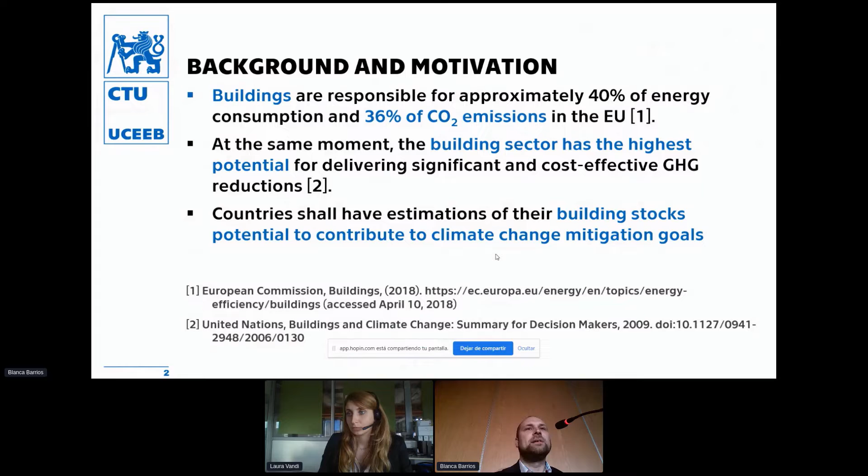So that was the motivation, and the objective of our study was to contribute to our national discussion and to review the renovation options of the existing building stock, define the renovation scenarios, quantify the potential of CO2 savings of each scenario towards 2050. And we also wanted to consider the potential impacts of future reduction of emission factors and the cleaning of the electricity system and so on.

And we also wanted to prepare a number for discussion at the national level for the potential share of the building stock in the national greenhouse gas emissions altogether.

The work was being done in past years in a couple of national projects, and it is also aligned to IEA Annex 72 on carbon footprint of buildings and carbon benchmarks for buildings.

And in order to deliver what we wanted and arrive at our goals, we first needed to make an inventory of the Czech building stock, then model its energy consumption, then define the scenarios, then define the energy sources and the shares, and estimate the future path and uptake of building-integrated and building-attached PV systems.

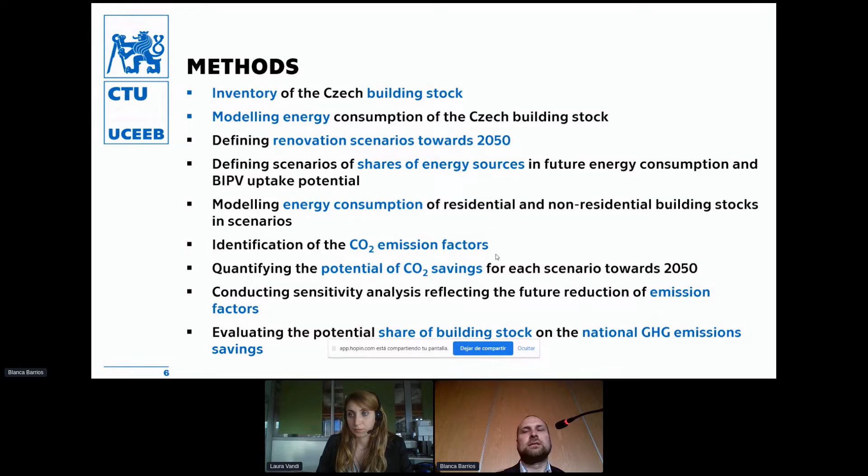The inventory of the Czech building stock was based on statistical data. We had data from the Czech Statistical Office. They also focused a survey in 2018 on the building stock. We got a survey on energy carriers used in buildings in the Energo 2015 census.

We also used the data from the National Registry of Energy Certificates and Energy Audits, provided by the Czech Ministry of Industry and Trade. We also had data from associations focusing on energy efficiency in buildings, such as associations of producers of thermal insulation and so on. We used data from them to estimate how big a proportion of the building stock is already renovated and what the renovation rate is, because we don't have an official number at the government level.

For the modeling, we divided the stock into residential and non-residential, and we used a stochastic model of 1,000 single-family houses and multi-family houses for the residential building stock. It was a dynamic simulation with variance, adapted to be representative of the building stock, for the numbers that came from the statistics.

For the non-residential building stock, we have real models of 100 representative buildings of different types, shapes, and uses. These are real models that were used for energy audits, so there are real data on consumption and on the options for renovations.

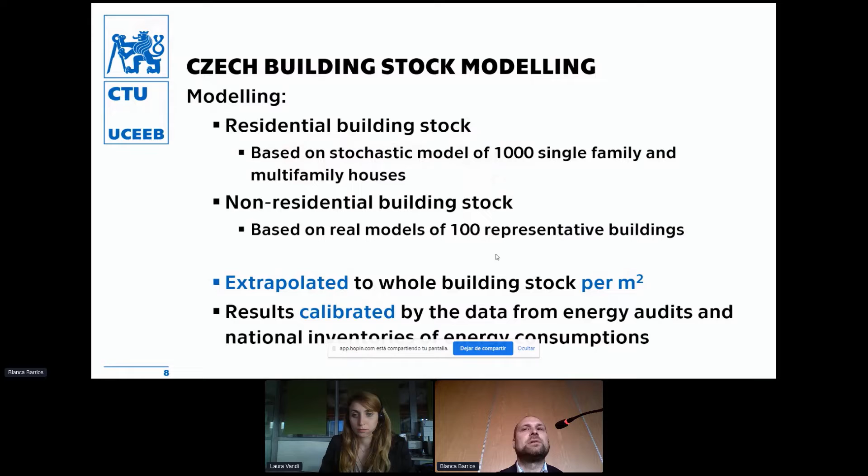So we used these models and extrapolated the outcomes to the building stock per square meter, energy-wise. And we calibrated the results to data from energy audits and from the national inventories of energy consumption.

After that, we defined 4 scenarios. The first was the baseline scenario, which corresponds to the state-of-the-art policy as it was in 2016-17 when we started this research. So that was the baseline. Our baseline year was 2016, in fact, already.

Then we have the scenario that was defined by the Ministry of Industry and Trade, which is responsible for the energy agenda of the Czech Republic, because we had the feeling that this scenario is not ambitious enough. That's why we included it, to be able to compare it with the other 2 scenarios.

One was the progressive scenario, modeling progressive deep energy retrofitting of the building stock, and we also have a hypothetical scenario, which was even faster. I will show you the shares that were considered.

So basically, each of the rectangles represents 100% of the Czech building stock. On the left is the base year 2016.

At the end, on the right, is 2050, and this is modeling of different levels of renovation rates. So basically, the gray part is the non-renovated building stock.

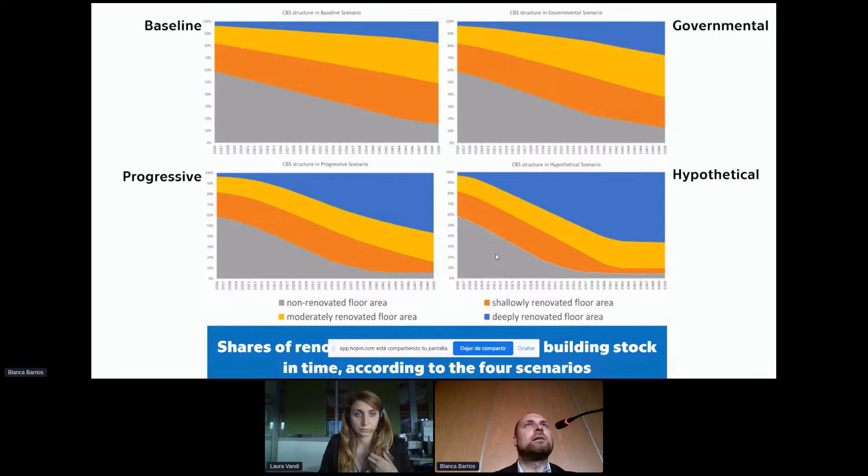We have created the path of the transition between the energy carriers. So you can see the starting point, which comes from statistics for 2016, and then we defined various ambitious levels for each scenario.

I will then show you the link to the paper when it's described more in detail.

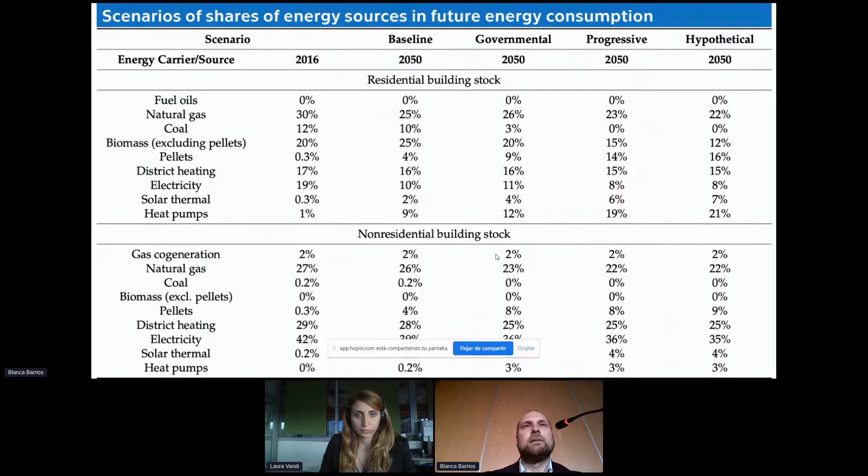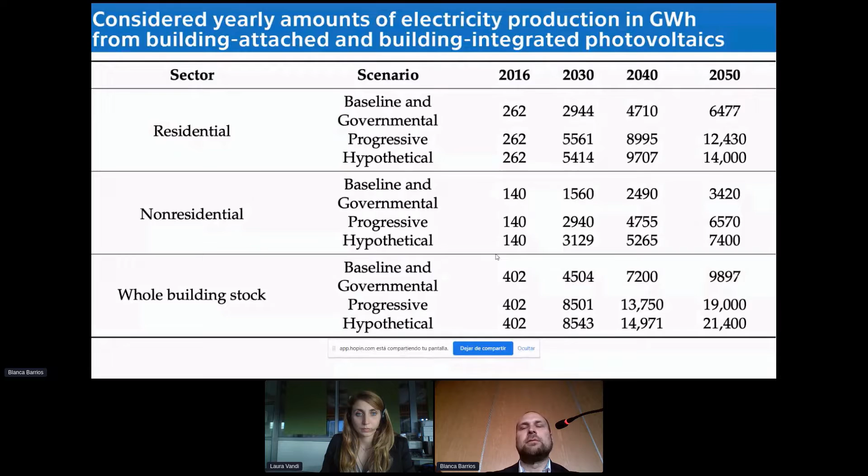We have considered yearly amounts of electricity production from building photovoltaics. We collaborated with the Association of Photovoltaic Systems of the Czech Republic, and they provided us their models and predictions how it could develop with the building attached and building integrated photovoltaics, and we used their scenarios to apply them to our models. Then we identified the emission factors.

Some of them are quite crude numbers, not really precise, but the precision of the whole estimation is somehow limited. So we went with them, and then we made the sensitivity analysis to be able to say how much it is sensitive to variation in future changes.

You can see that electricity from the national grid is quite dirty still. A couple of years ago, the numbers were much higher. Now we are shutting down brown coal power plants, so it's going down. So the official number in 2019, when doing this simulation, was 0.6. Nowadays it's like 0.48, and it goes steadily down, but it's still the second or third dirtiest energy grid in the European Union.

For the various scenarios, for the sensitivity analysis, we have just used two thirds and one third of the electricity emission factor.

We also were looking into the reduction of emission factor on district heating systems, because renewables are being more and more applied in district heating. And we also worked with some syngas or biogas options that could be filled into the gas distribution system. So we also modeled some reduction of the emission factor of natural gas nowadays.

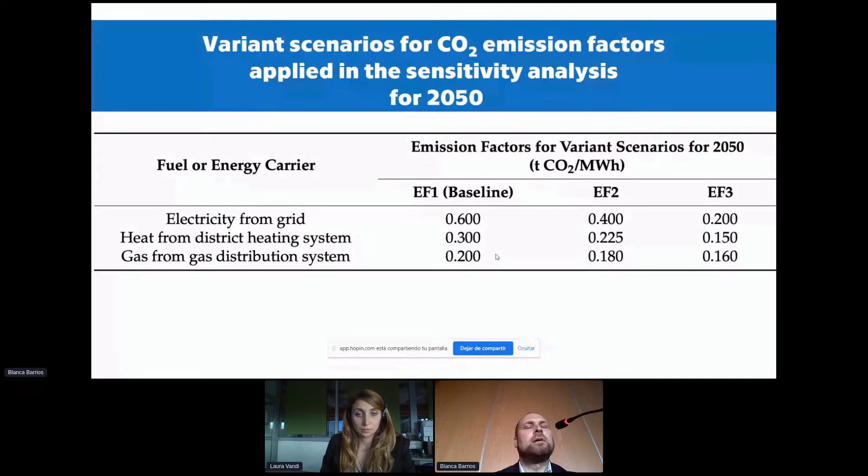So after we calculated, we evaluated the potential share of building stock of national greenhouse gas emissions. This was our starting point, because the goal, which is not much ambitious at all, but it's some goal that was written in our legislation, is 80% reduction compared to 1990. So it's our national target for the whole country: some 33 megatons of CO2. To put it in perspective, in 2016 it was 106.

So when we make the calculations and modeling of the Czech building stock, we came up with a figure of about 37 megatons of CO2, which was about 35% of the national emission. So basically, if we have the buildings as we have now, and we would like to reduce the national emissions by 80%, we would need to switch everything else except buildings, which is of course not the case.

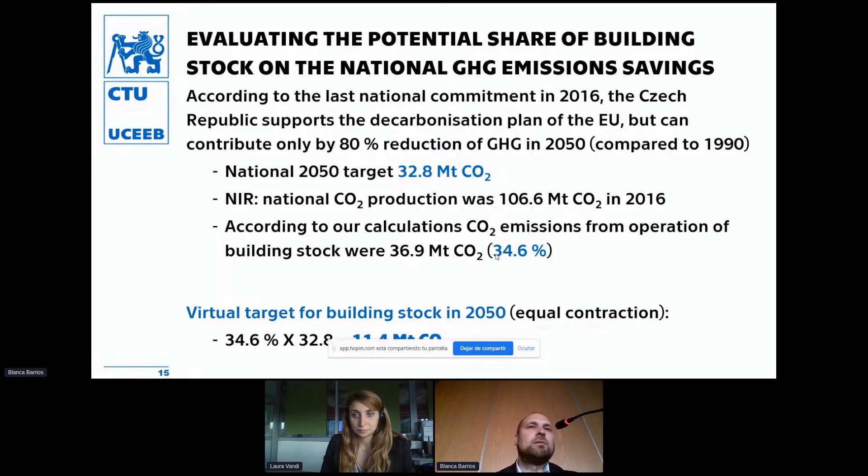So we set some virtual target for buildings. We calculated with equal contraction of the sectors. So we took the 34.6% share, multiplied it by the national target, and we arrived at 11.4 megatons, which is the emission goal - quite soft, but still a goal for the building stock. And we are looking if we can achieve that.

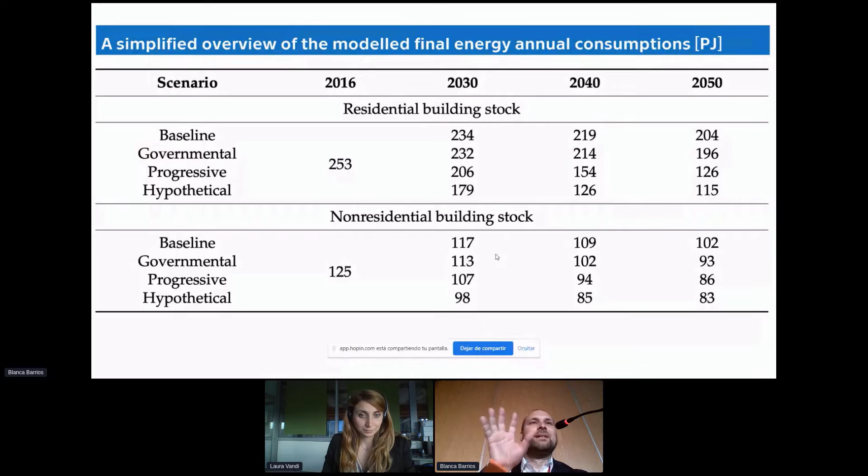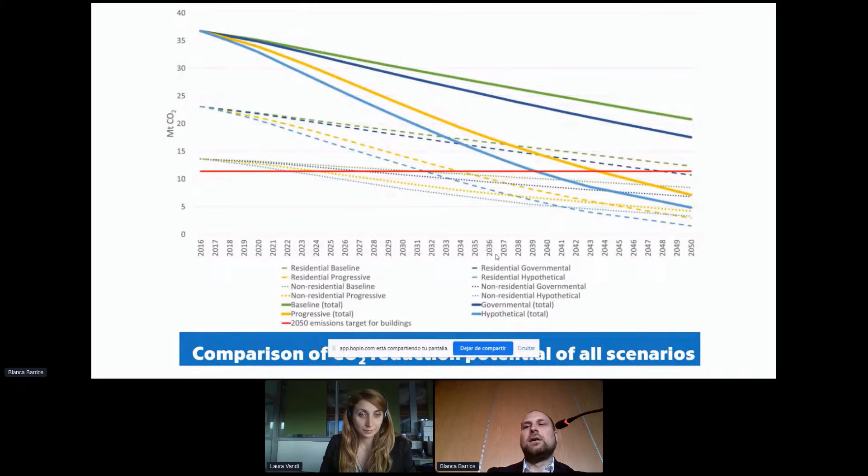So results: residential and non-residential building stock, but I will show you in a chart better. The full lines represent the whole building stock in the scenarios. The red line is the 80% goal, and you can see that the governmental scenario would not be reaching that goal. The other two would be possible to arrive at: the progressive and hypothetical.

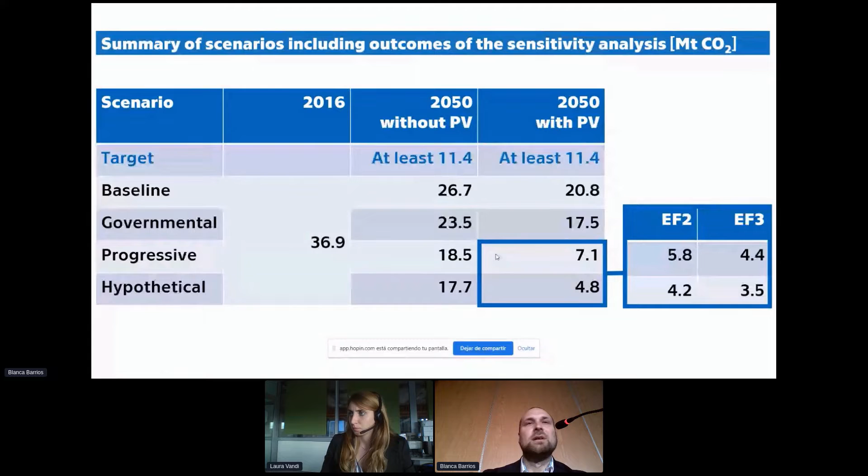And if we look at the numbers, as I mentioned, the goal was 11.4 megatons. And if we look into future changes in the emission factors as well, we can reduce it to 3.5, but it's still not zero, at least for what we have. There are a lot of uncertainties - emission factors, future development of shares of energy sources, development of building stock, and the patterns of energy consumption in buildings, and climate change. And we left out the embodied emissions entirely - that's another story.

So I'm arriving at the conclusion. If the national commitment is to be achieved, we need to apply at least the progressive scenario, which means that we need to speed up the renovation rates to 3% per year until 2025, and go to the passive house level for most of the new renovations. And if we combine the decarbonization of building stock, like in the operation measure, it's almost possible, but it would need bold actions and of course high investments and support from the state.

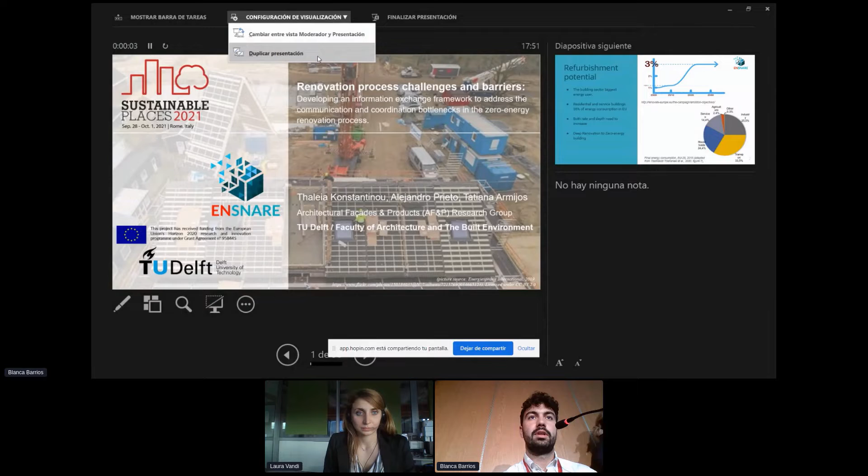Hello, well, to the people here and to the people watching us online. So today I'm going to talk about renovation process challenges and barriers, which is a study that we did within the framework of the ENSNARE project, which has the purpose of accelerating deep renovation.

So, we go to the next slide. Yes, there you go. So again, we have almost the identical data that we saw before. Bottom line is, the building sector uses a lot of energy, and we need, in order to reach the climate goal, to increase both the rate and the depth of renovation, going towards deep to zero renovation.

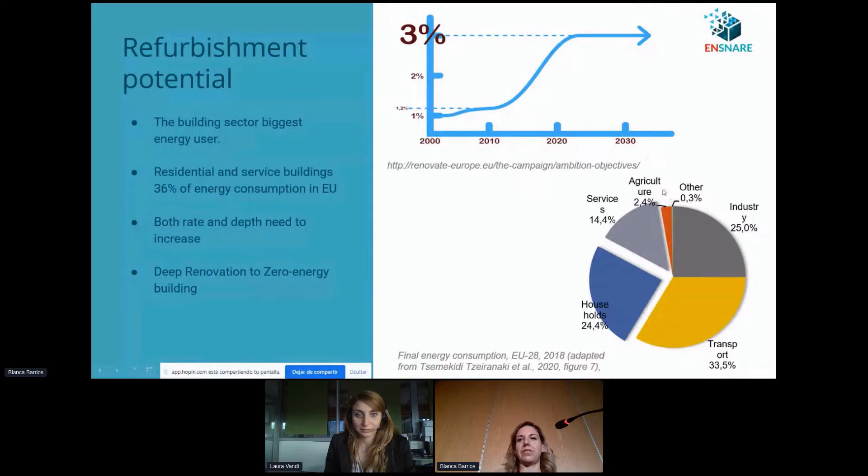That's a graph showing that, but I think we just heard how this is true from the Czech Republic, and the image in Europe is similar. So basically what we should keep from that is that we need to go towards deep, zero energy renovation, which means that we need to integrate a lot of components, and this means that the complexity of those renovations increases.

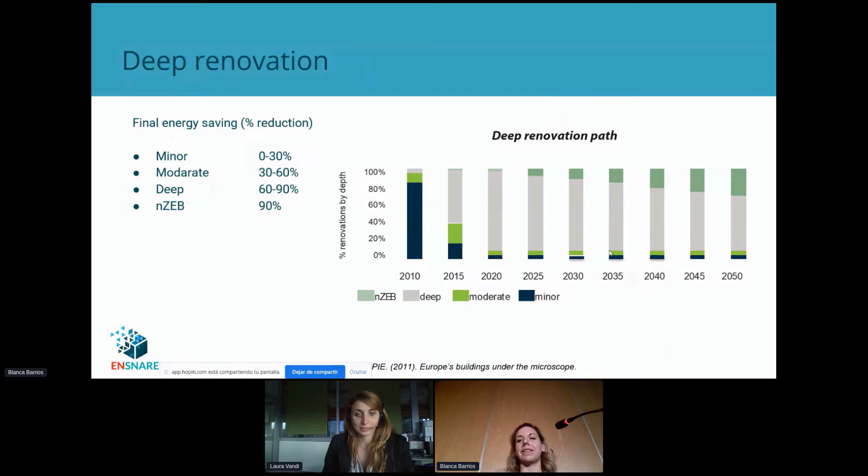And industrialization is a way to do that. Apart from being able to combine a lot of components in one solution, we also have the chance to improve productivity, which makes upscaling possible, reduce cost through economies of scale, reduce on-site construction time, have design and engineering efficiency, also reduce construction waste and material use. So there is a lot of potential, that's why it's part of our objectives in this project.

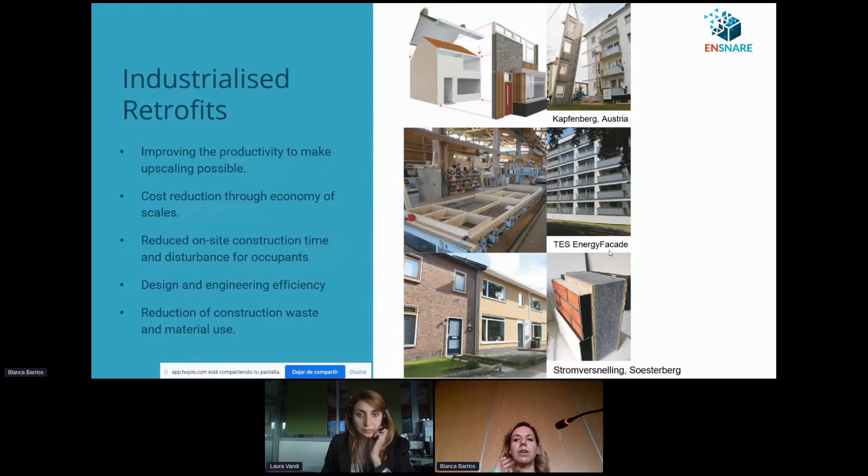However, industrialized renovation has a lot of challenges. We heard some of those yesterday in the workshop at this conference. There are a lot of studies, this is also one study discussing those challenges, and we see that a lot of them are technical because of the complexity, but they're also linked to financial barriers, and also barriers related to stakeholders and information, awareness, having good estimation of the benefits, and so on.

So in order to help this process and overcome these barriers, the objective of this study, which was done within the framework of the ENSNARE project, is to map the renovation process and address the most important bottlenecks in order to make the renovation process more efficient, and identify specifically the type of information that stakeholders require in the different phases of the renovation, in an effort to structure the workflow between those actors and make it more efficient in terms of time, but also in terms of cost.

The method to do that was, first, we had an exploration of state-of-the-art projects. We looked at 17 research and innovation EU projects to identify the type of target users, the type of information, and so on. Then, based on this information, we focused on expert interaction, focusing particularly on the consortium of this project, with an online questionnaire used for initial data gathering, and then some structured stakeholder workshops.

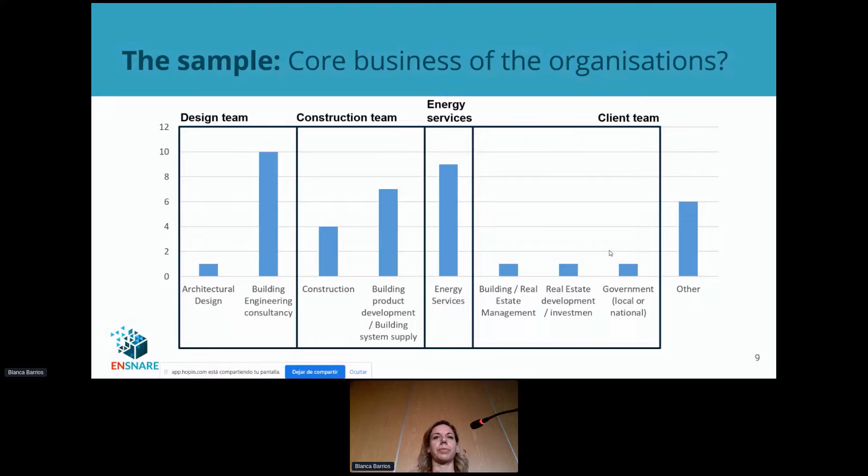So the results—I'm going to talk on those four main issues, which is about identifying the phases, and then the role of the stakeholder in every phase, and then the information flow and the main bottlenecks, because this is the basis to proceed later to give solutions and make this process more efficient.

In the renovation phases, we can see in different publications and reports different ways of organizing that. But in general, we can see them as having the pre-project that defines the scope. This is also where the building diagnostics are happening, initial cost estimations, and some initial scenarios, ending up with the specification for the project and the design team.

If we combine those phases and look at which stakeholders are more involved, we can see that the design team has a strong involvement. The design team we can conceive as architects and engineering consultants, and they start from phase 1. Sometimes in phase 1 they don't even have the assignment yet to do the project, but they are involved in the discussion.

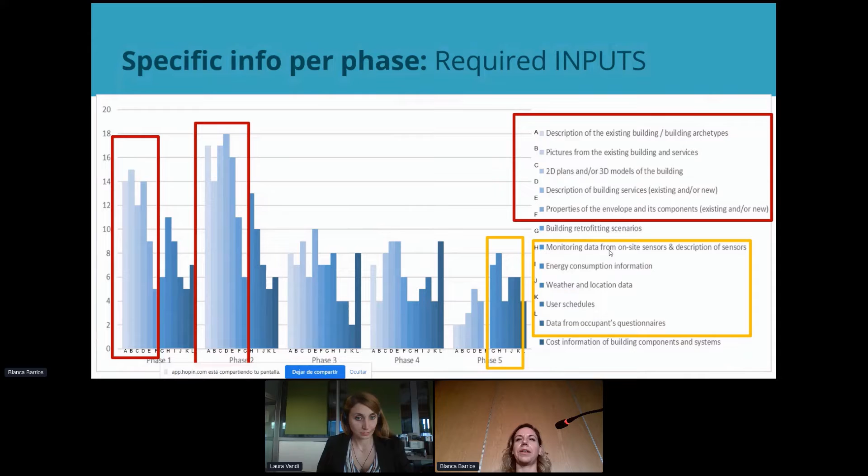And when we're moving towards the later phases, we see that data about monitoring and energy consumption, and data from occupant questionnaires about comfort and function become very important in the final phase, where the building operates. The cost is highlighted as well.

It becomes very relevant. It's always relevant from phase 1, but it really sticks out in phase 3 and 4, where we really involve the suppliers, and they have to give the tenders and the final products, and order those products and install them.

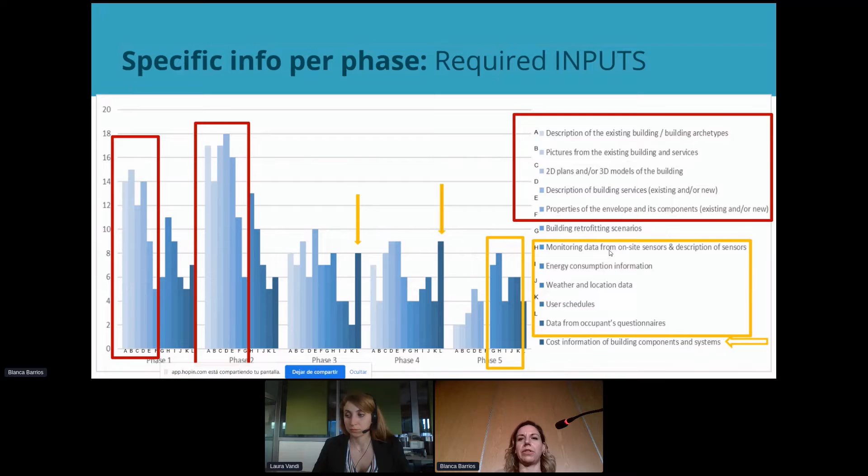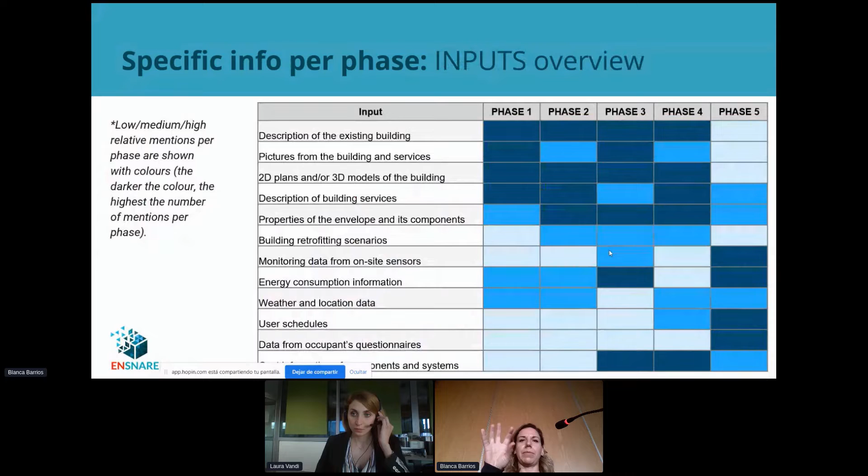So that's another expression of the graph we showed before. The darker colors are where those types of inputs are more mentioned during the questionnaires, and basically described at the beginning. It also shows the importance of the information of the existing building as input in terms of information.

So going to the outputs, in the sense of what kind of results or what kind of information the communication during the design needs to have, we see a lot at the beginning. We want to see a lot about design scenarios, and also indication about energy demand and energy consumption.

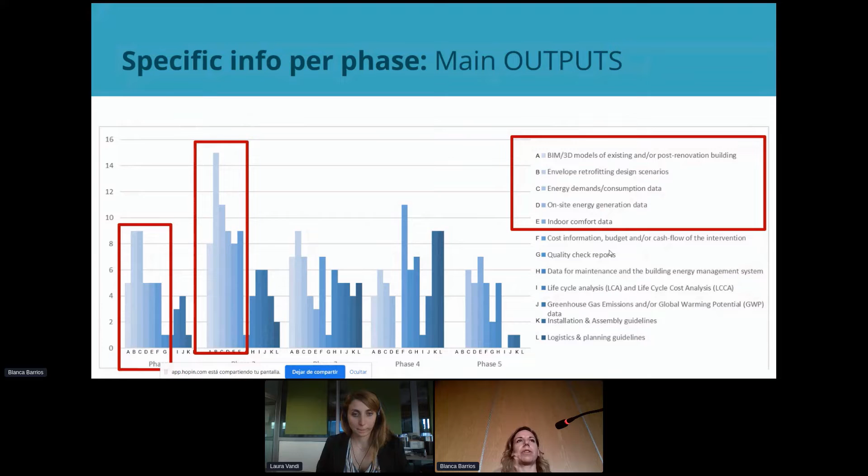We see this both in phase 1 and 2. I think that's important, because we can see that those phases, even though they are distinct by when, for example, the commission starts for the project, they very much merge in terms of the type of information that we want during this discussion.

Then moving towards the other phases, we can see in phase 4, which is the manufacturing, that we need a lot of details about the product, installation guidelines, logistics and planning guidelines. So these are the types of information that are needed, and that can also be seen as the result of the communication of the stakeholders.

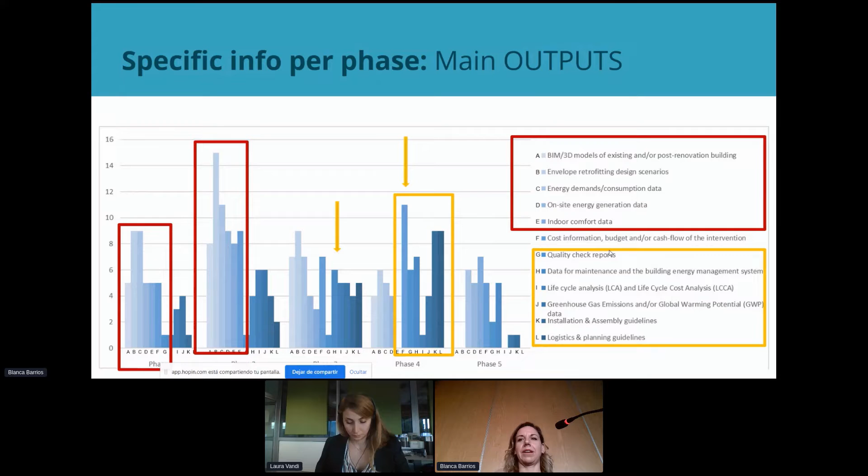And here I highlighted the cost again, because we see it popping out more in the tendering phase. That's again the same expression of the type of output that we can see in this communication. I mean, we talk here in terms of input and output, because this is the basis work for making a communication platform to support the process, but we can also see it as information flow: what information we need, and what information the stakeholders need to give back as results.

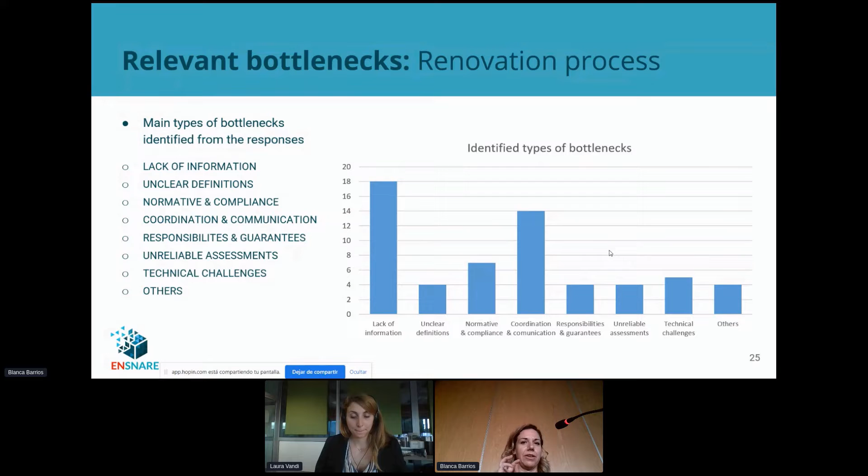So yes, that's I think the main takeaways from this part regarding the bottlenecks. Really keep in mind that the type of information they need to exchange is important, and also how coordination and communication between the stakeholders works.

So to conclude, it's important for the common goal that I think a lot of people here have, which is to increase the rate of renovation and make the process more efficient. To this end, the stakeholder communication and information exchange need to improve. Understanding this process and which parties need to communicate about what and when is crucial, and that's the purpose of the study and the results presented before.

Based on that, we have some recommendations and conclusions that we also take for our project to develop further. We identified that it's important to give some archetypes in order to be able to provide renovation scenarios and cost indications at the early stage with minimum effort. The building data are very important, and they're used throughout the process in different phases, and we need different levels of detail. So it's very important to have a comprehensive checklist of the data we need to collect regarding the building.

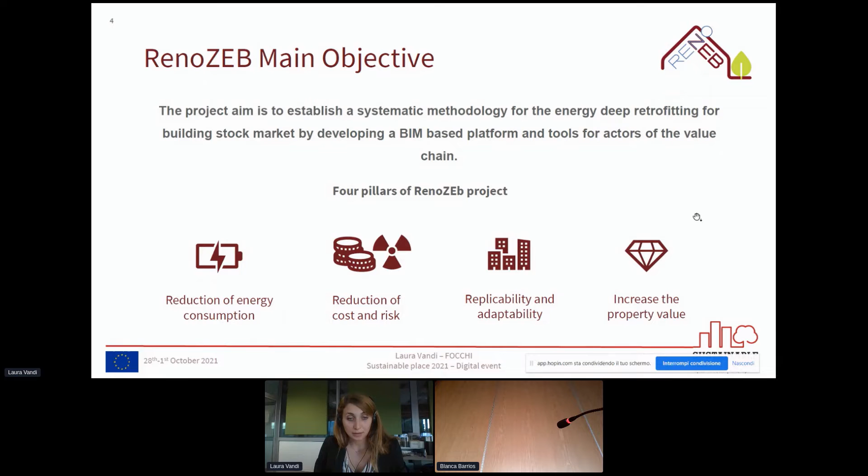As a starting point, we considered the boundary conditions for the development of the plug-and-play facade. It is a crucial element because it is the enabler of the methodology, but for its development we started by analyzing the existing boundary conditions of the facade. The key elements to consider are the structural part and the openings. The methodology aims to provide a solution with low intrusiveness, so we needed to keep the facade configuration as it was.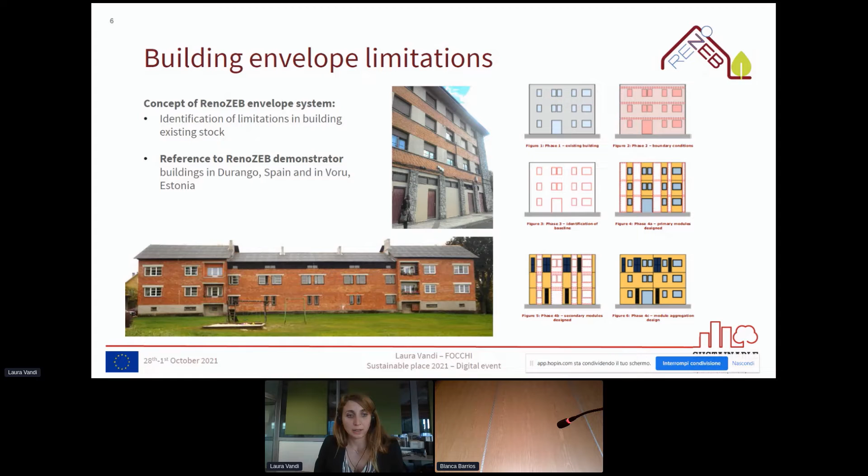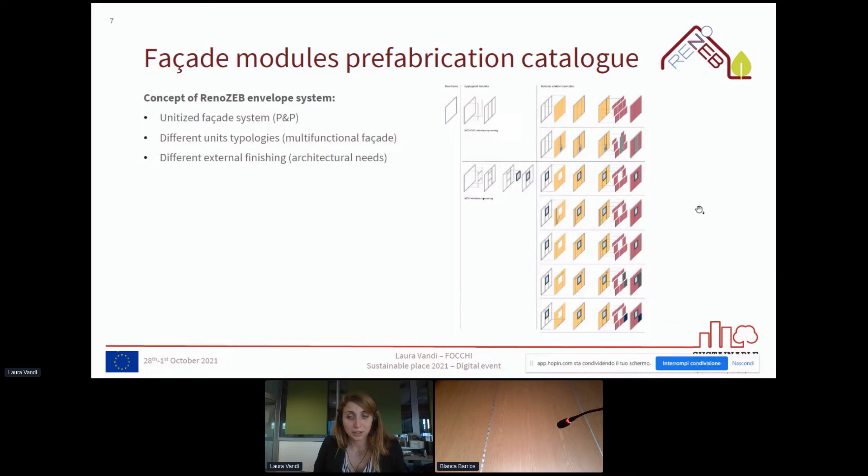So we started by analyzing and designing the facade module with the window, which has to be fixed, and then the secondary module, which is the module between two different window openings. An important product in the development of the facade was the catalog, because the plug-and-play facade within RenoZEB refers to standard curtain wall facades, and the project offers a series of unit typologies as well as different cladding materials. But let's talk about the development of the Focchi facade system itself.

The concept is composed of 3 different layers. The existing wall is the first layer, which has to be maintained as it is. The second layer is the cavity, which has crucial importance because it hosts the bracket system. In the bracket system, the RenoZEB prefabricated panel is hung through the existing wall. The third layer is the RenoZEB prefabricated panel itself.

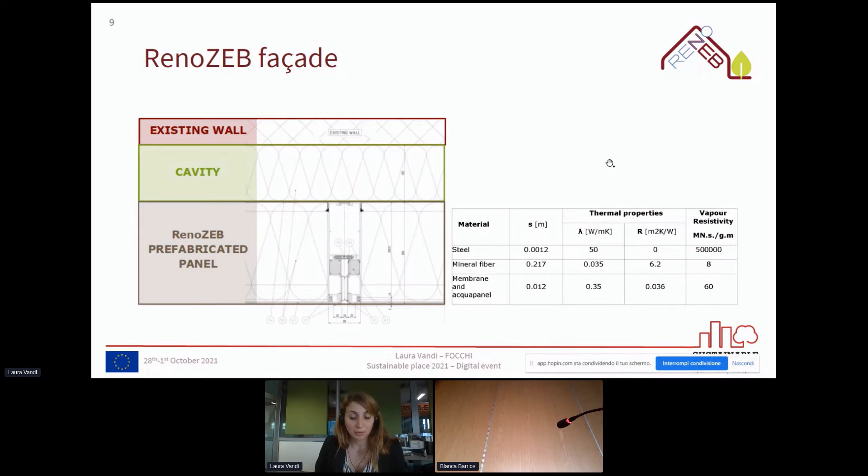Here you can see the technical drawing of the preliminary facade system. As I said, RenoZEB plug-and-play refers to a curtain wall facade, so we started by analyzing and using the materials of a standard curtain wall facade. But as an innovative solution to fulfill the requirement of breathability, we introduced an alternative solution: the introduction of a membrane.

So we replaced the metal sheet usually used for tightness of the insulated panel with a membrane. The internal membrane acts as a vapor barrier, then there's the insulated panel, and the external membrane guarantees waterproofness, with the cladding system directly in contact with the external membrane. This is the second solution we developed.

What are the main differences between the first and second solution? Mainly two: first, the introduction of a ventilated cavity between the external membrane and the cladding system. Second, we wanted to avoid as much as possible the use of structural sealant, because we wanted to consider the disassembling phase of the plug-and-play facade. So in this configuration we could guarantee breathability through the ventilated cavity, and the structural silicone was replaced with a mechanical fixing.

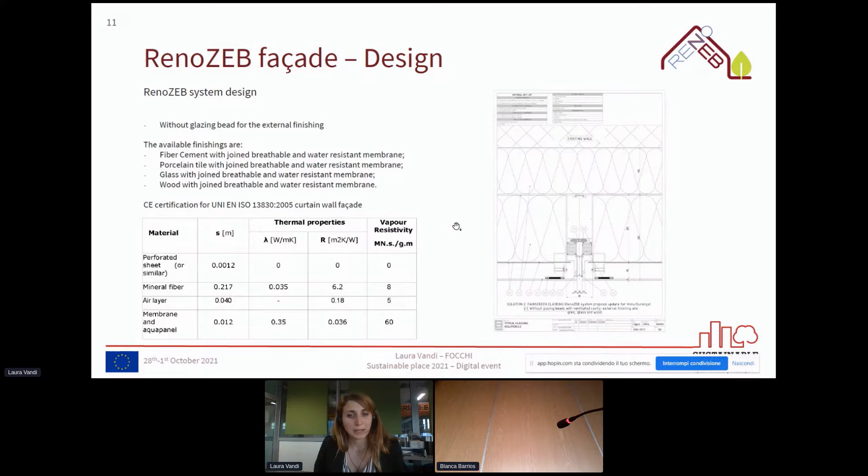We also conducted Glaser tests for condensation. In both RenoZEB demo cases, in Durango and Voru, the simulation has been validated, so no condensation will be present inside the RenoZEB facade.

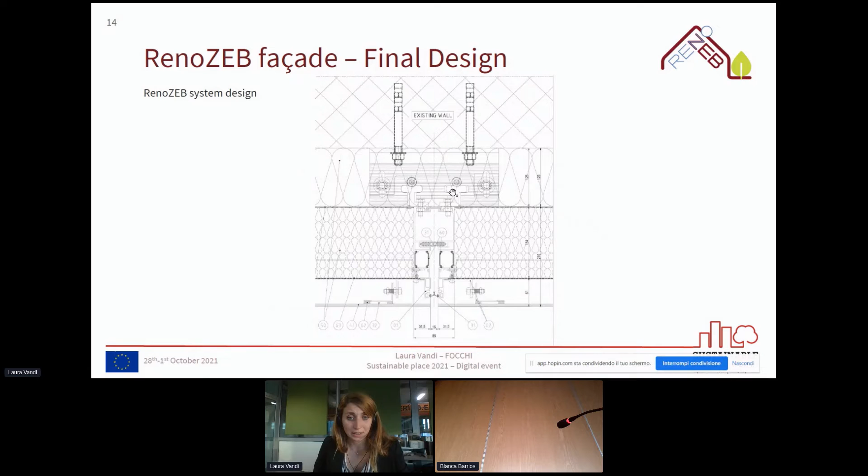This is the Voru demo case; the previous one was Durango. Here you can see the final solution of our RenoZEB facade. As I said, there's the existing wall, the detail of the bracket fixed to the existing wall, and the prefabricated RenoZEB panel, which hangs within the bracket. The technical drawing is spread across different unit typologies.

So we have set a catalog as we have seen in the previous slide. In particular, there is the opaque unit, which is completely a spandrel part. And you can see in the right part of the slide the U-value transmittance that we have simulated and tested

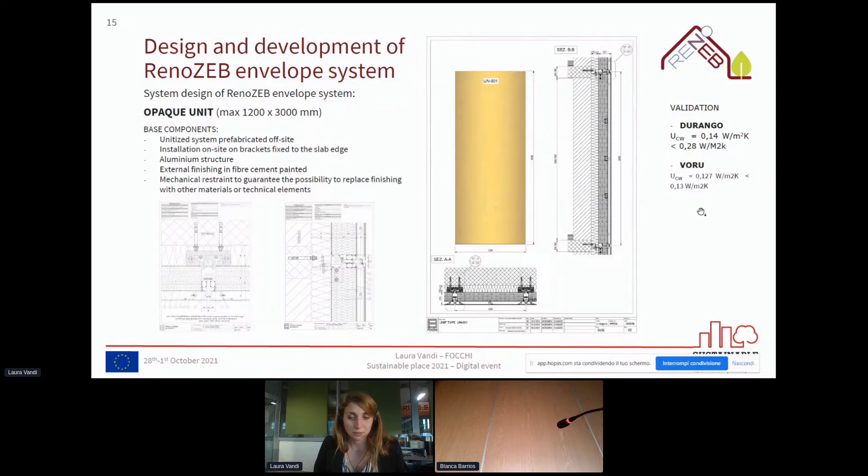with this configuration. An important feature is the customization. This solution could offer our customers the possibility and opportunity to choose the material that they want to have in their building. Some examples are the cement board panel, the wood, fiber cement, or also porcelain tile.

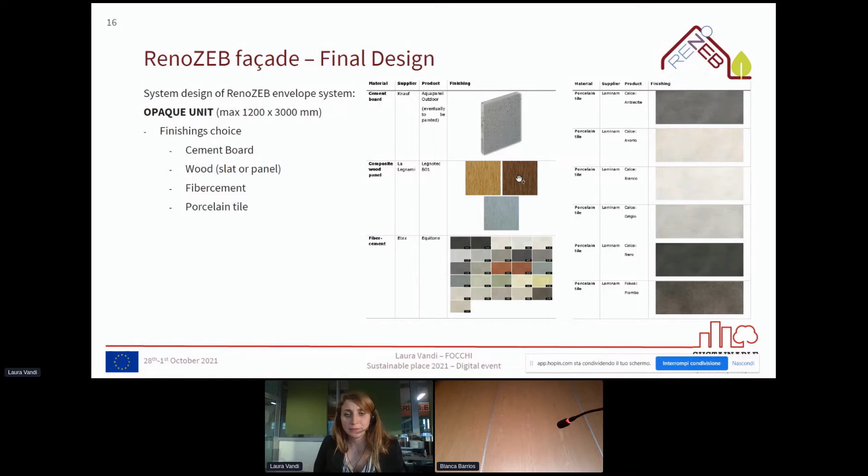And here there are just some examples of color and finishing for the build to meet all the aesthetical requirements. Here you can see the window module, which has integrated in itself the monoblock technologies and the roller shutter. Also, we have integrated several sensors and mechanical ventilation in order to monitor the indoor comfort.

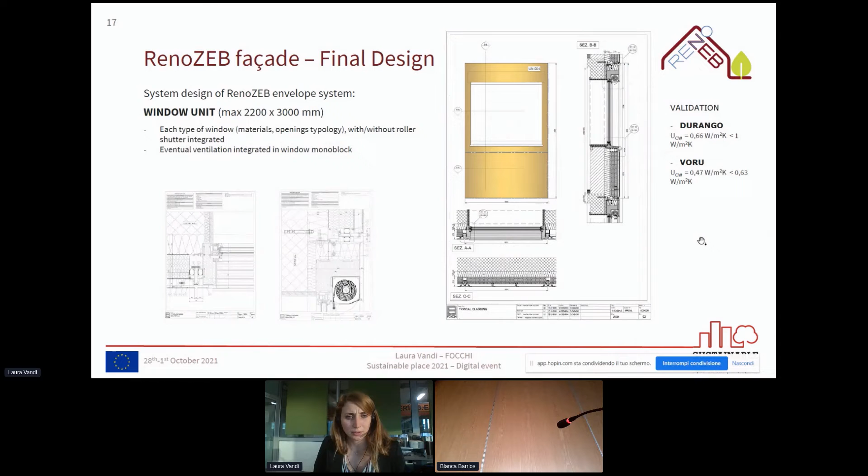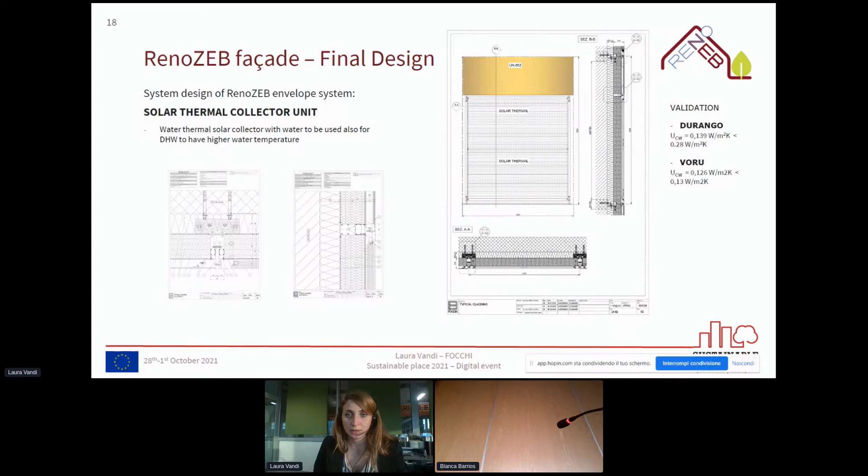Again, another typology, which is the solar thermal collector unit. In the cladding system, we have integrated a solar panel as well as a photovoltaic panel.

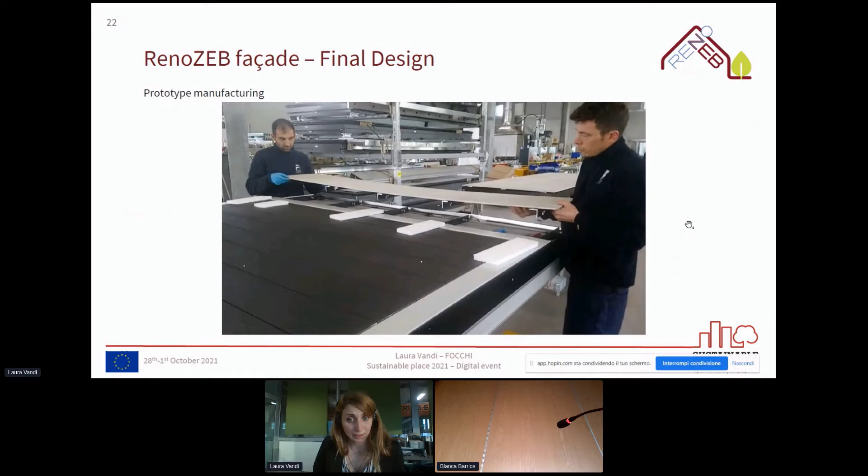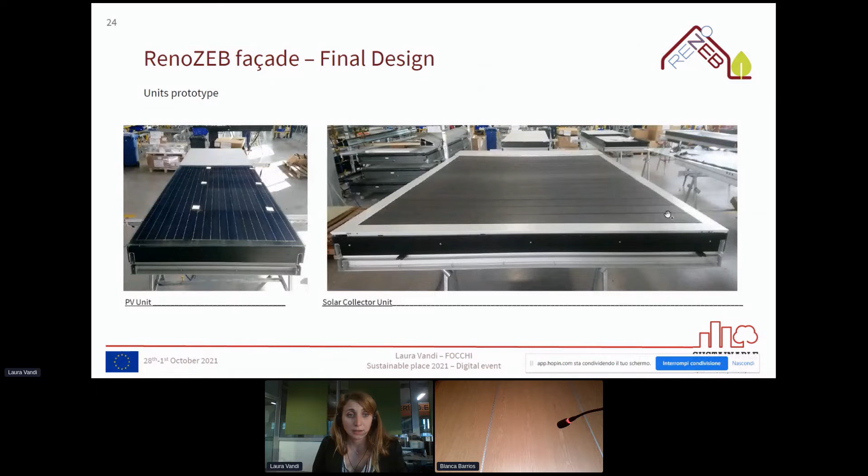facade module. We have the opaque unit, the window one, the photovoltaic, as well as the solar collector unit. An important feature is the installation phase.

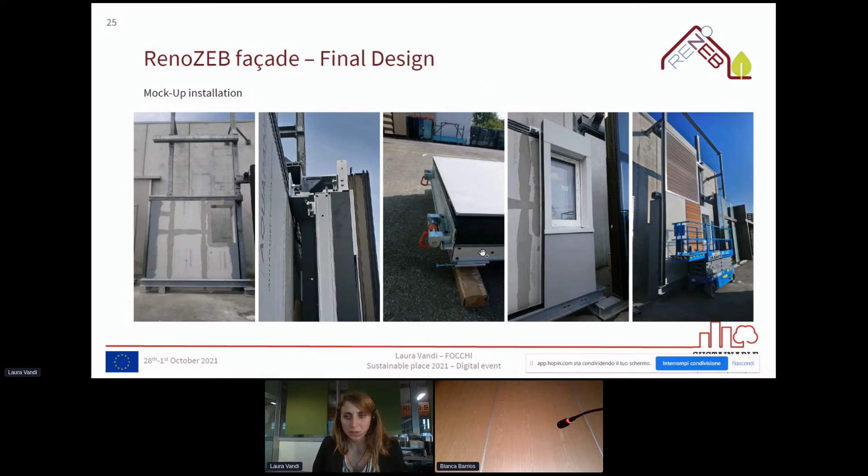Here we have simulated an existing facade in our facility. And you can see here all the phases, the bracket installation, the raising of the unit, and here the final solution. We have tried, in one single visual mockup, to use different cladding just to show the result. And here the concept: existing wall, cavity filled by insulated panel, and the RenoZEB panel.

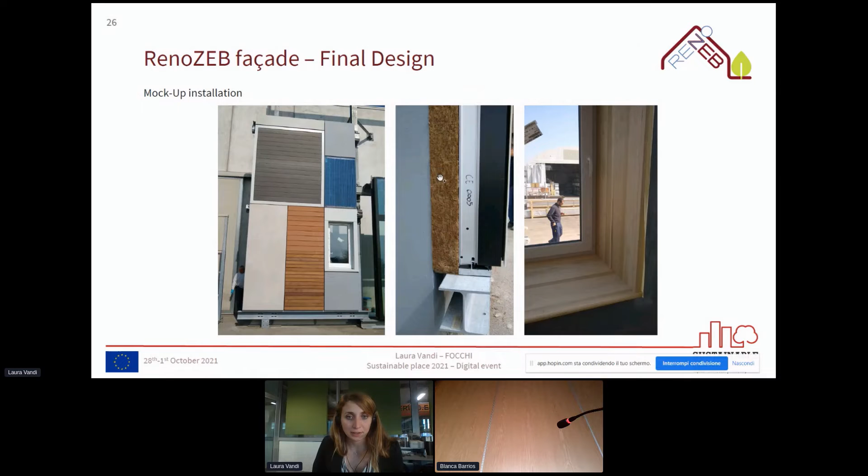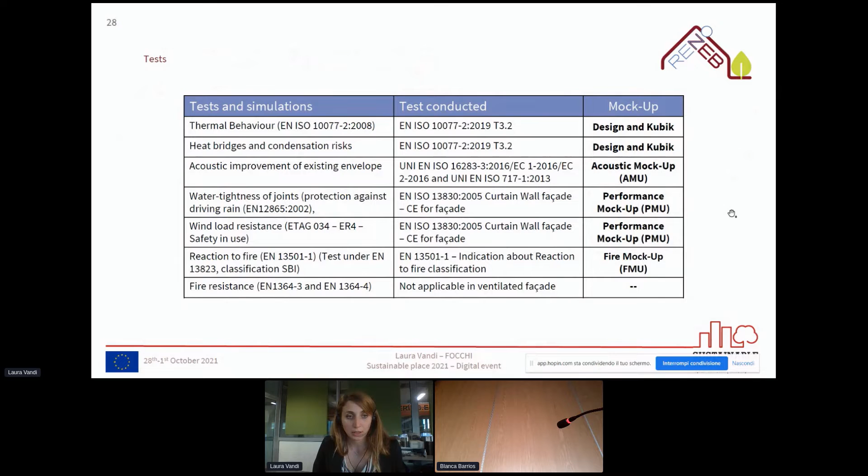I'm going to discuss the testing that we have conducted. In the slide are listed all the tests which investigated the thermal, the acoustic, and the fire behavior of this system facade solution. Let's start with the acoustic mockup.

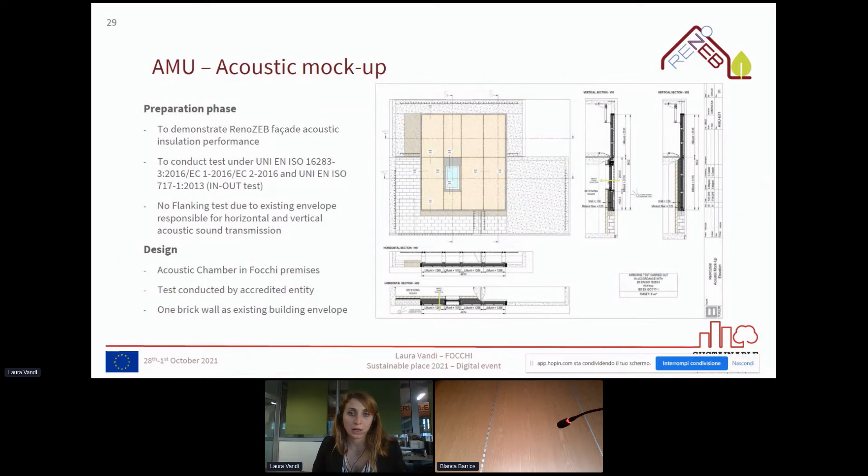Some results - we are really satisfied about the result, because we have seen an improvement of the acoustic behavior in comparison to a normal brick wall.

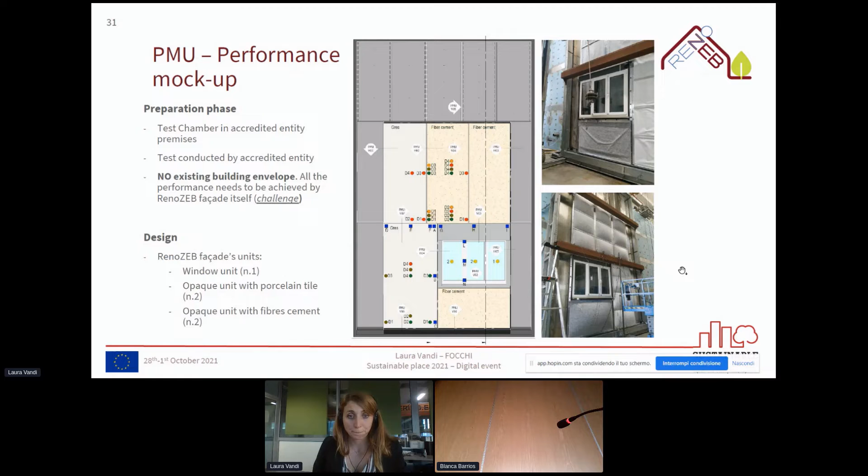And then this is the performance mockup. The design and the impact test. You can see in this picture there is the impact test and the pressure test. Also in this case, we are satisfied regarding the test because we fulfill all the requirements of the curtain wall standards.

And at the end, also the fire mockup was a success, because we tried 3 different configurations for the fire mockup. We tried the part which were in direct contact with the air, so the external cladding, the cavity, the ventilated cavity, and the cavity between the existing wall and the prefabricated panel.

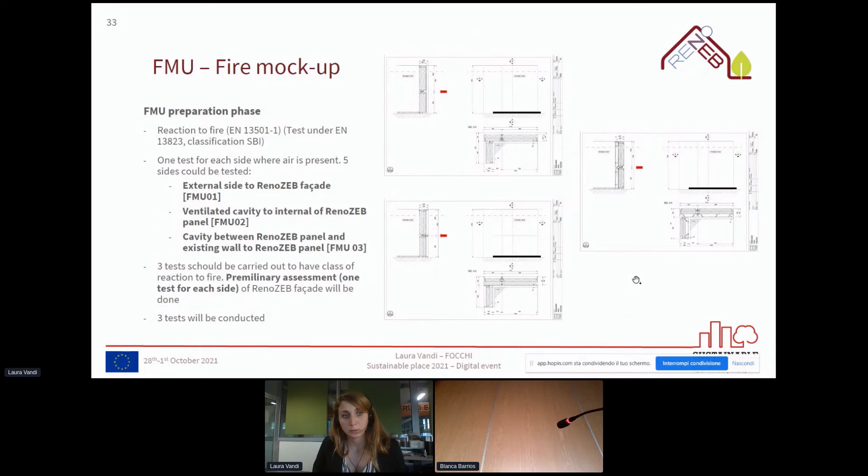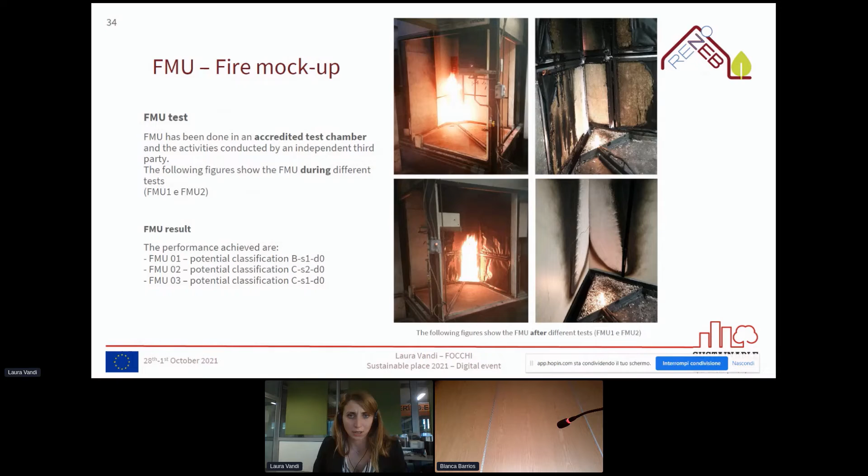And here the most important test that we have conducted is the Kubik. 6 facade units have been installed in the real living lab of Kubik, which is set in Tecnalia, in Spain. And it was really important for understanding the installation phase, but also to test all the thermal behavior and the indoor comfort tested in a real environment before installing the facade in the demo building.

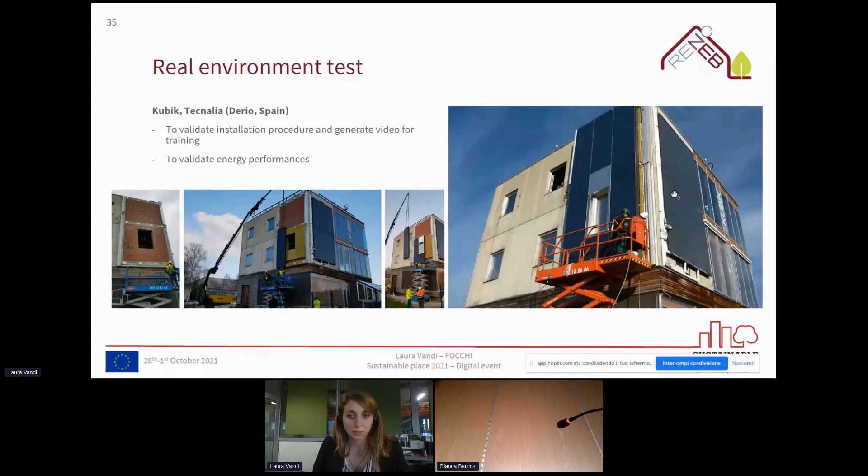So in conclusion, we can say that the plug-and-play facade is a valuable technology solution for building envelope deep retrofitting. It's important because it's a customized product, because it's based on technology and product present on the market, and it can offer high quality because it is a prefabricated module facade.

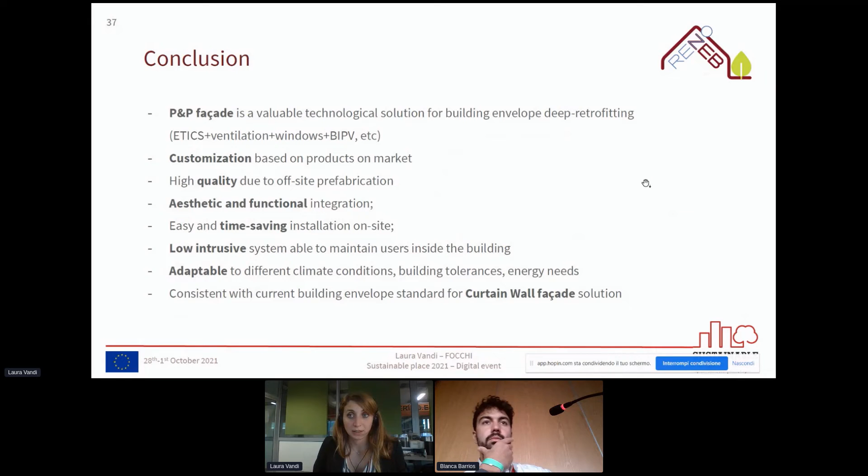And we can say that we have fulfilled all the objectives that RenoZEB had. Thank you for your attention. If you have any question, I will be more than happy to reply. And thank you.

Thank you very much, Laura. First of all, congratulations for the end of the project. I can see that you are pretty satisfied with all the results of the tests that you have performed. For sure, really plug and play solution. I saw it from the picture, so congratulations for that as well.

Just one question from my side. Maybe I will ask over here to the audience as well, if they have any. But when do you think it will be ready for the market?

Do you need some more testing, and to install it in other use cases? Can you tell me, in 1, 2, 5 years, will it be ready or not?

We are really satisfied with the result. As I said, we wanted to reach a TRL 7, but the prototype, the product, could already be ready for the market. We have already tested it, with 2 demo cases tested in a real environment. Some improvement can be done in terms of thickness, because it's a quite thick solution, so it can be reduced in millimeters, but it could be ready for the market in 6 months.

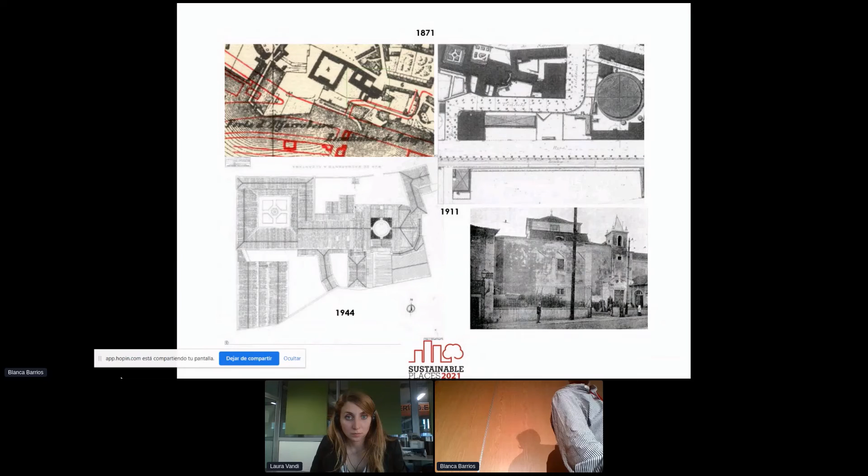This cloister had a gate that, over the years, in the beginning of the 20th century, you see the second courtyard disappeared, and in pictures from 1944 this courtyard was lost. But this is going to be useful for the project.

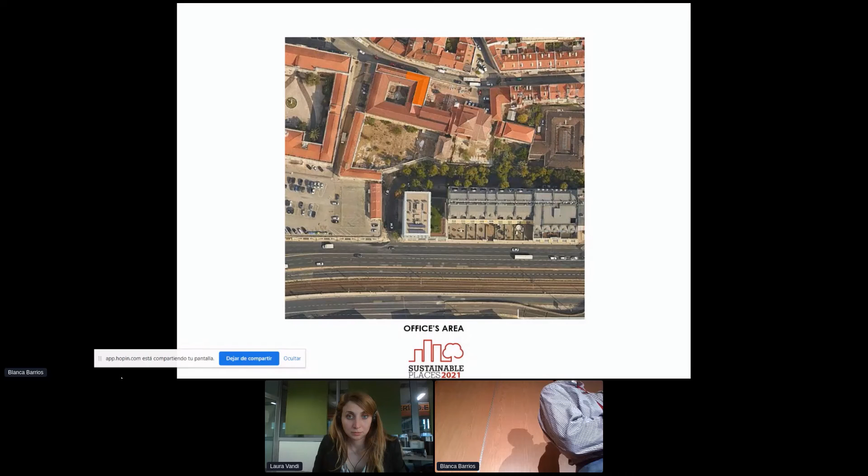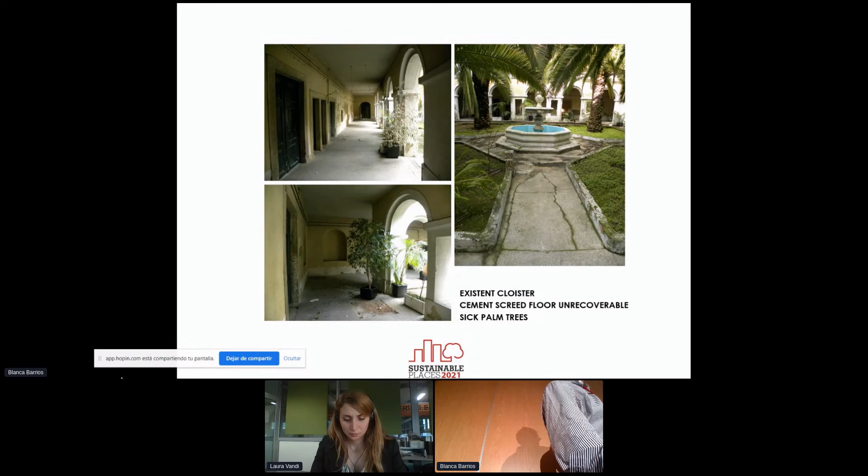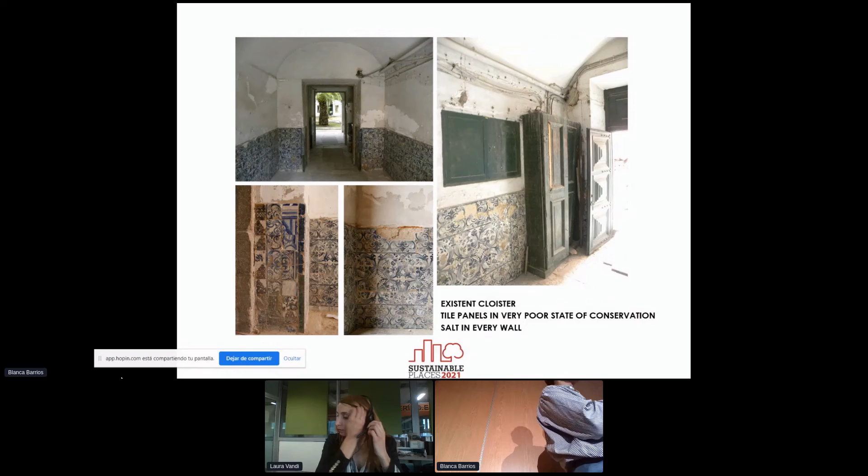When I arrived there, the cloister was very, very destroyed. The floors were in cement screed and were unrecoverable. There were some holes from past digging for archaeological excavations, and there were tile panels in a very poor state of conservation, with a lot of salt and a lot of lost tiles.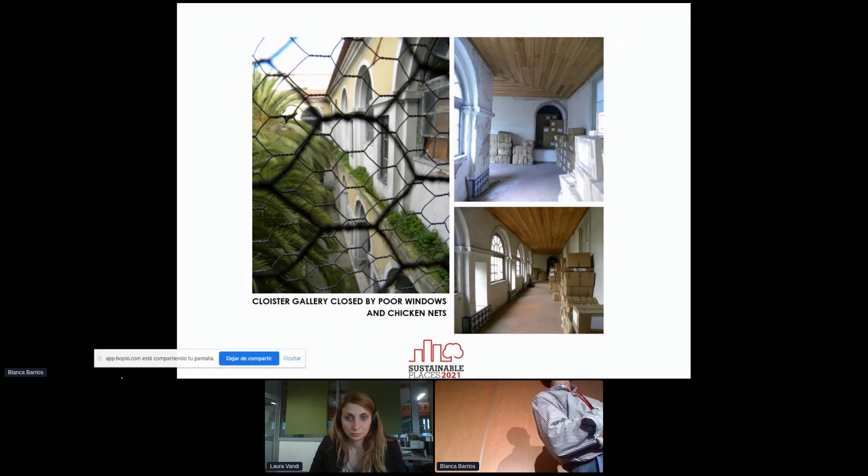On the first floor, all the openings were closed with windows and chicken nets, as it was transformed into a storage room. But on the ground, outside where the courtyard existed, there were some scars in the ground, and these were useful for the project.

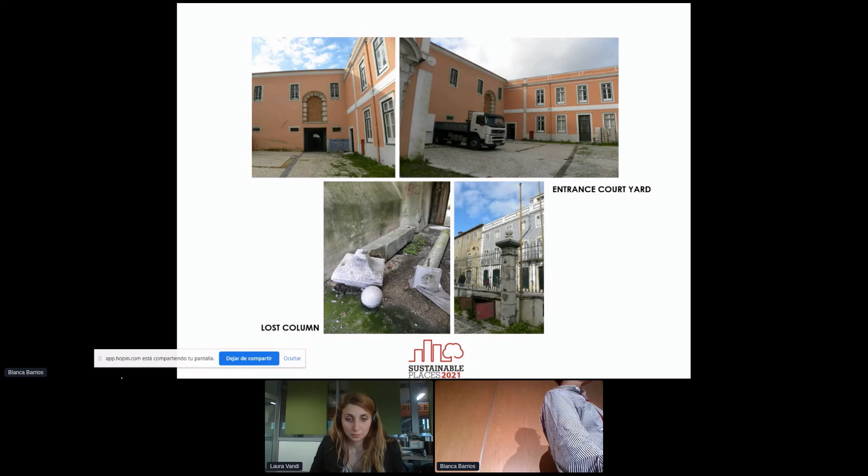On the right side there's a column, and we found the other column lying down in the backyard, which is going to be important. The interior was transformed into a storeroom, with a lot of moisture, a lot of rotten wood, and some stucco falling down.

So the project itself was here. In architecture, yellow is what you are going to demolish, red is what you are going to add, and black is what exists and stays. This was something created by Viollet-le-Duc in the 19th century, and we still use it. It was a very good idea.

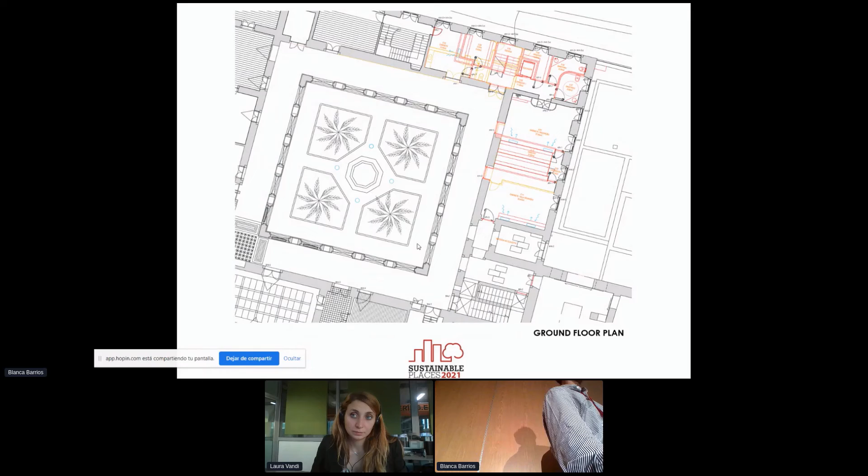You can see the major walls are kept, but the major intervention happens on the upper part, where the structure was weaker and more destroyed. On the first floor the same applies; the staircase and elevator show up on both levels. One of the ideas of the project was to recreate this courtyard of the entrance.

Because this is going to be for a former president, we wanted to create an area for him to get out of the car and go inside with the comfort of being covered by walls. So the idea was not to rebuild the walls, since they were lost, but to recreate the space with a green area.

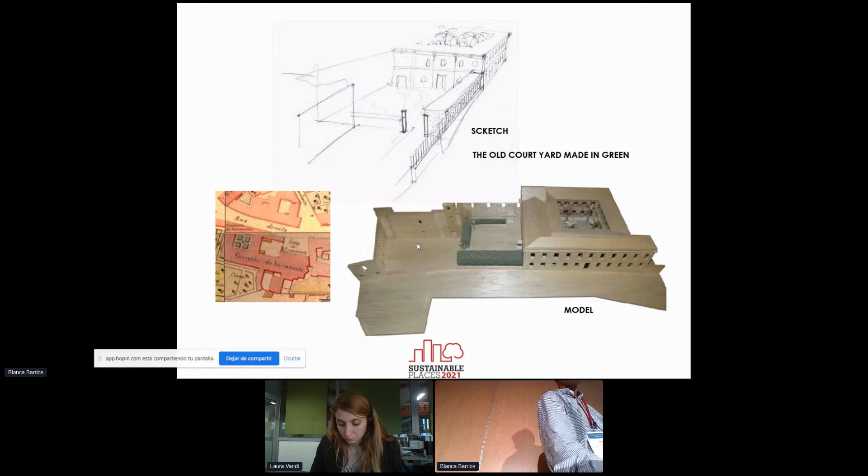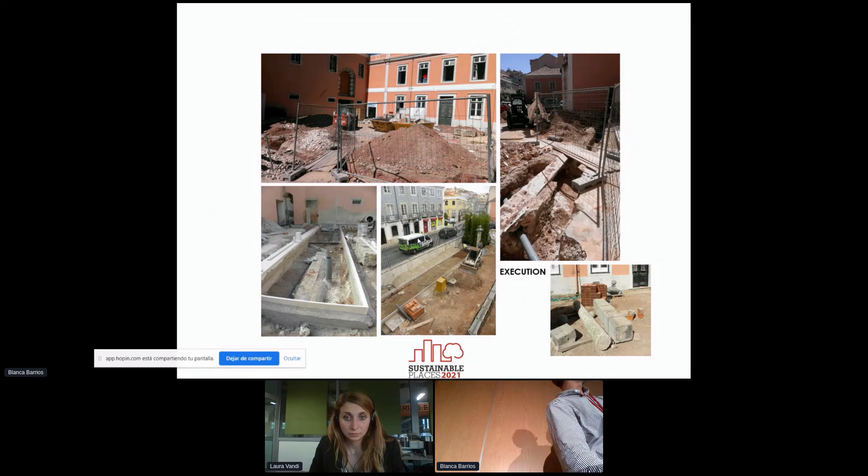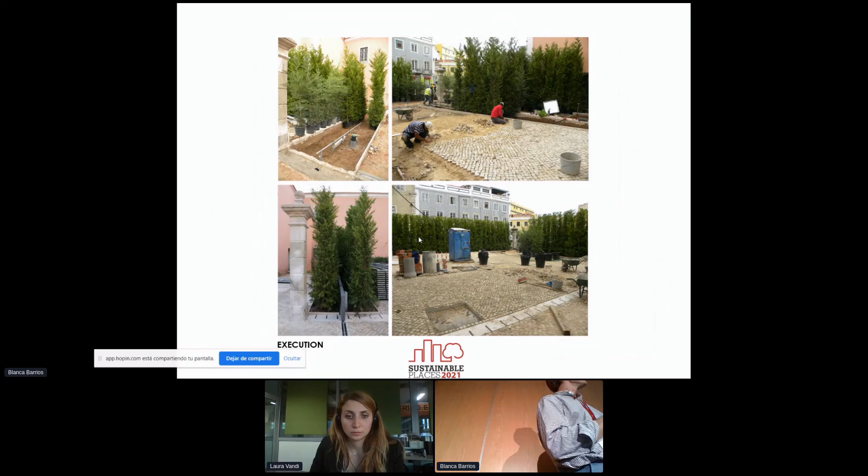The courtyard was created with the plants, and in the end it stayed like this, with this light gate that disappears inside the bushes, but creates a space, a nice area to get in and get out of the car.

All the tile panels that were lost were replicated, of course copies, but we filled the pieces with lime, and then it was painted with temperas and colors to gain an integration of the forms and colors.

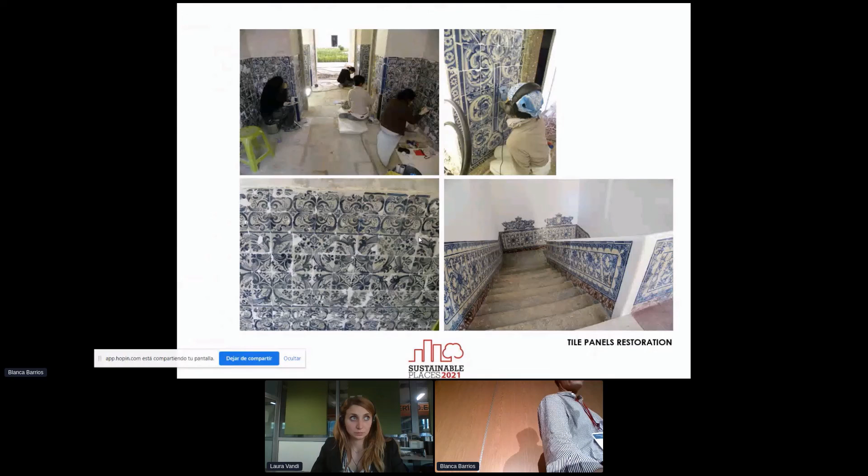In the center we had 4 palm trees that were attacked by the bug that eats palm trees. It happened all over the south of Europe at least, and a new pavement was added to the place.

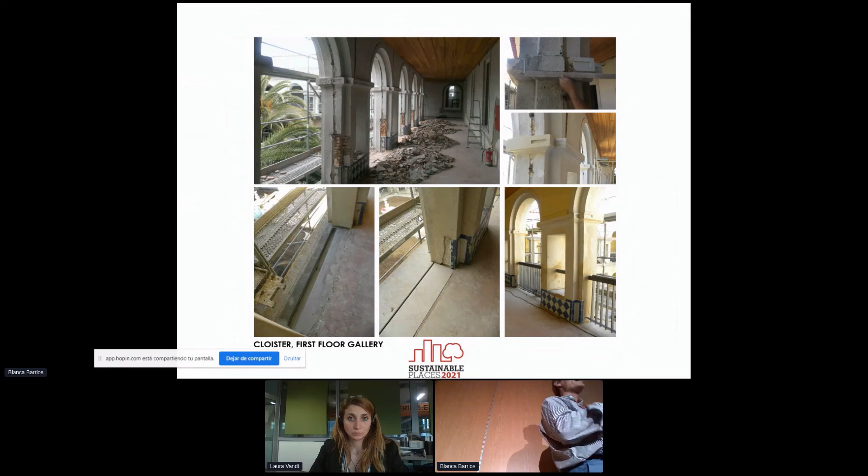On the upper floor we removed the windows and redesigned the handrails on the right side, based on that picture from 1940 that we saw, and we added the medallions on the arches, because they were lost and they were important for the drawing of the cloister.

And here you can see the pavement, and on top there are some stone boxes to hide the lights that we are going to see, and all these were made with the same stone, because all the additions were made with the same stone.

Here on the left we see a handrail that was there and one that was redone. This one was the existing one, and the new one was redone with a very formal essentialization. It was simple forms, but when you are far it looks the same, though one is the existing and one is the new one.

So in the end the cloister became like this. We recreated the form of one of the 7 Serlio treatise cloisters that exist in Portugal. It was damaged in its form and it became again how it was, with lighting for night ceremonies and gatherings when needed.

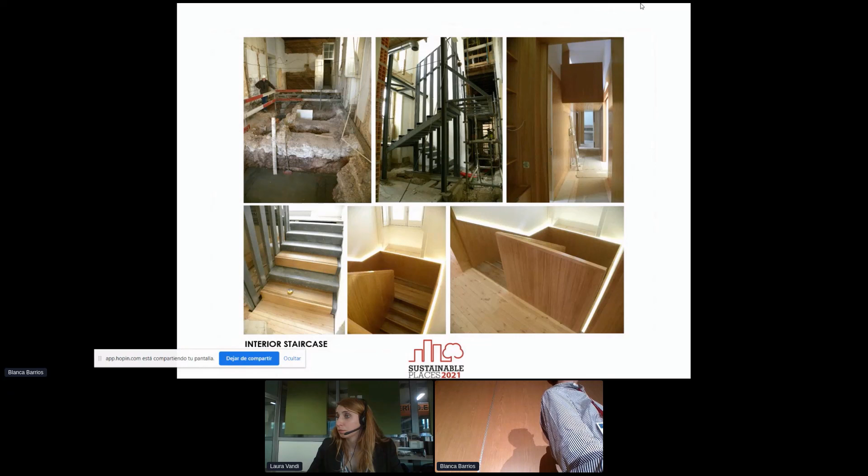We had to reinforce the pavement because it was going down, and because this was a huge room and we didn't want to cut the ceilings, the divisions were made with just furniture, which you can see here in this picture — these are shelves, 50 centimeters deep. You go in, pack things, and come out, because it's just the space to go in and come out.

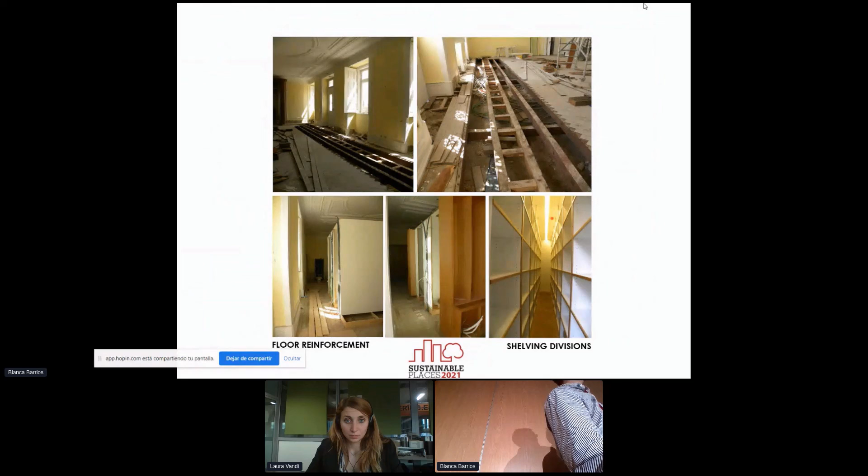Again on the upper floor, the same. It was just needed to reinforce this in order to put that furniture there that divides the working area for the former president from the meeting room on the other side.

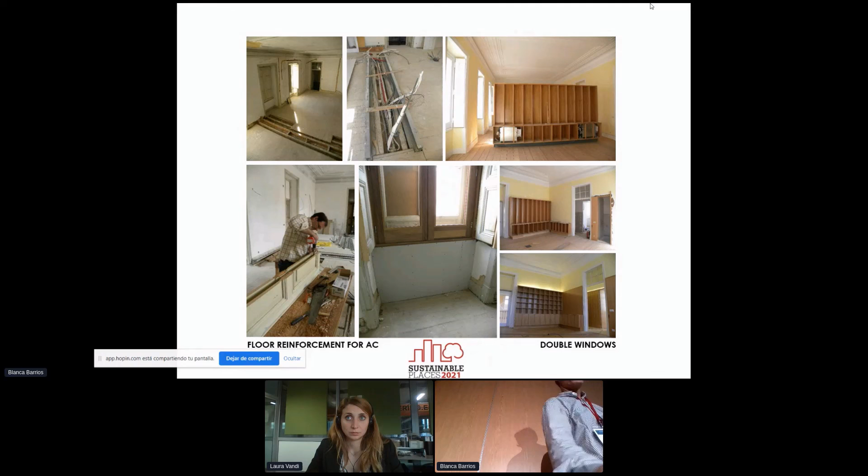One interesting thing here at the bottom is that because we are making an intervention on just one piece of the convent, we needed thermal and acoustic comfort. So we added a new layer, a new window on the inside, and left the windows as they were on the outside. This is the final result before the furniture comes in, with some pieces already placed, and in the end just the logo to add.

That's it. Thank you.

Thank you, Pedro. Very nice work. I really liked all the pictures, also because you reused some of the things that were already there, so you tried to clean them.

It's unfortunate about the palm trees having to be cut, but they were lost because of the bugs, I can understand. Yes, there's no solution when they are going to die. We have examples of people trying to save them with medicines, and after a year of treatments they die anyway, so it was useless. Yeah, I will give you this.

Where is it located? In Lisbon? Yes, in Lisbon. Okay, good. Next time let's hope I will be able to go there.